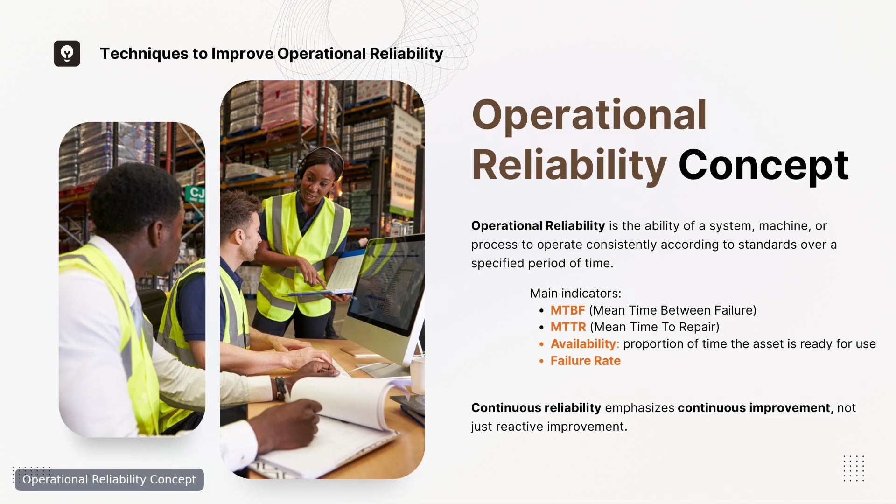The first maintenance strategy we will discuss is preventive maintenance, commonly known as PM. Preventive maintenance refers to scheduled maintenance activities that are performed before failures occur. The basic idea is simple. Instead of waiting for machines to break down, organizations maintain them periodically. Preventive maintenance can take several forms. The first is time based maintenance, which means maintenance activities are conducted at fixed time intervals. The second is usage based maintenance, where maintenance depends on machine usage, such as operating hours or production cycles. The third type involves routine inspections and lubrication activities.

Preventive maintenance offers several advantages. First, it can reduce unplanned downtime because problems are addressed before failures occur. Second, it can extend asset lifespan, allowing machines to operate longer. Third, it helps create more predictable maintenance costs. However, preventive maintenance also has some disadvantages. One major issue is over maintenance, where machines are serviced even though they do not actually require maintenance. Another challenge is the lack of adaptability to real machine conditions. Because maintenance schedules are fixed, preventive maintenance is also less effective for random failures, which occur unexpectedly.

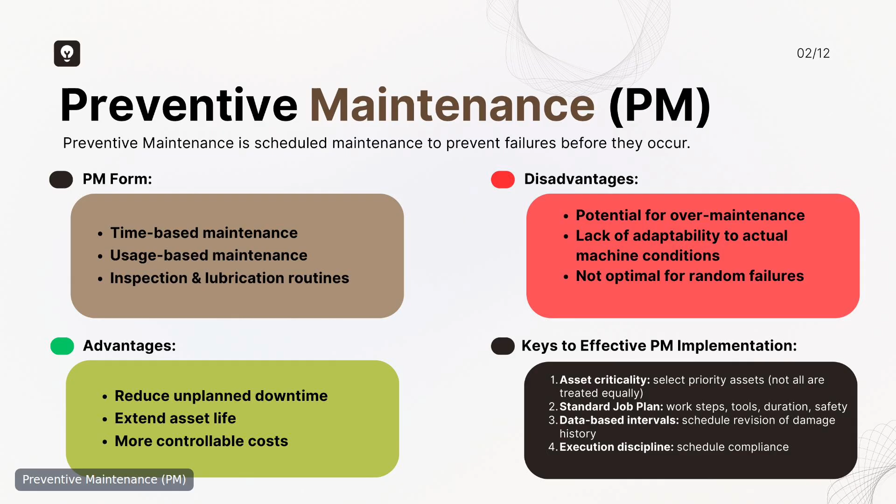For PM to be effective, several implementation principles must be followed. Organizations must first determine asset criticality, meaning not all machines require the same level of maintenance. Second, organizations must develop standard job plans, including procedures, tools, time estimates, and safety guidelines. Third, maintenance intervals should be based on historical failure data. Finally, organizations must ensure execution discipline, meaning maintenance schedules must be followed consistently.

The next strategy is predictive maintenance, often abbreviated as PdM. Predictive maintenance is a more advanced approach that uses actual condition data from assets to predict potential failures. Instead of following fixed schedules, predictive maintenance monitors equipment conditions in real time. An important concept in predictive maintenance is the P-F interval. The P-F interval refers to the time between potential failure and functional failure. Potential failure occurs when early signs of damage begin to appear. For example, vibration levels may increase or temperature may rise. Functional failure occurs when the asset can no longer perform its intended function.

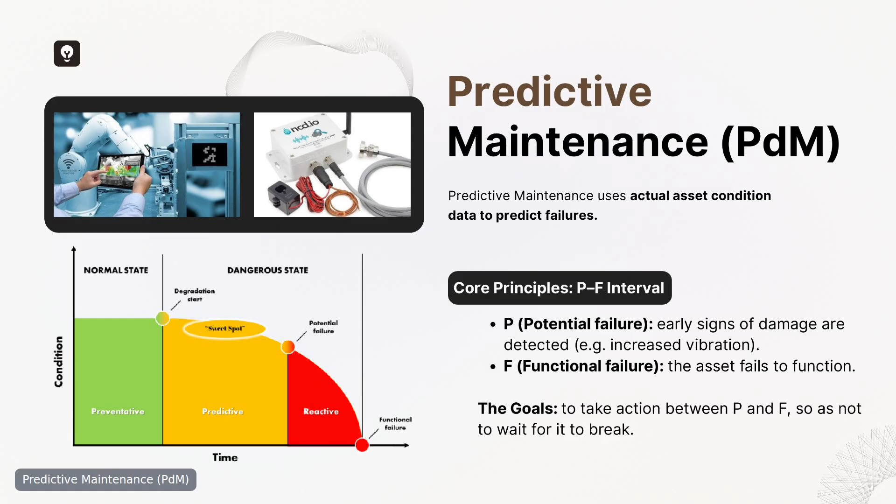The main objective of predictive maintenance is to detect problems during the P-F interval. This allows maintenance teams to repair or replace components before total failure occurs. This strategy significantly reduces unexpected breakdowns. Predictive maintenance relies heavily on monitoring technologies. One commonly used technique is vibration analysis, which can detect mechanical problems such as imbalance, misalignment, or bearing wear. Another technique is thermography, which uses thermal imaging to identify hotspots in electrical systems or motors.

Organizations may also perform oil analysis, which examines contamination levels and metal particles in lubricants. More recently, companies are using IoT sensors and AI analytics to monitor machine conditions in real time. These systems can track variables such as temperature, vibration, and electrical current. Predictive maintenance provides several benefits. First, it enables data driven maintenance decisions. Second, it minimizes downtime because failures can be predicted. Third, it improves long term cost efficiency.

However, predictive maintenance also has limitations. It requires initial investment in sensors, software, and technical expertise. The system also depends heavily on data quality. If the data is inaccurate, the predictions will also be incorrect. Finally, organizations must establish clear decision processes determining when maintenance action should be taken after alarms are detected.

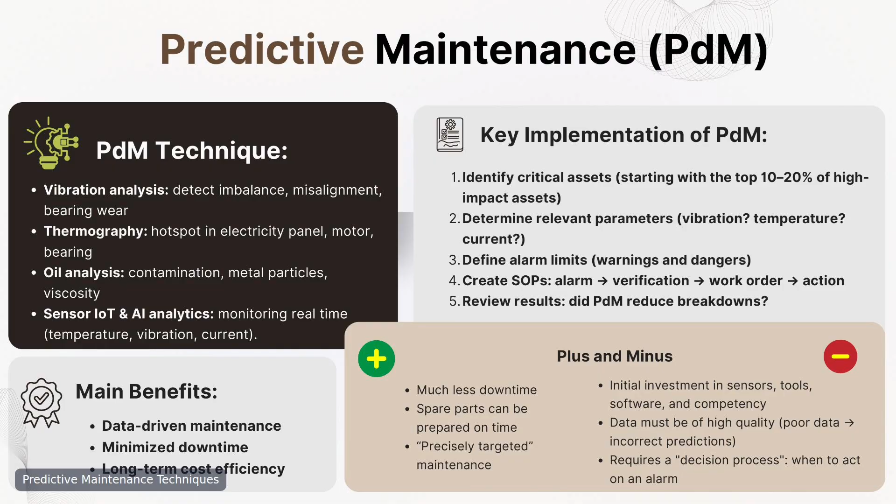Another important approach is reliability centered maintenance, or RCM. RCM is a systematic approach used to determine the most appropriate maintenance strategy for each asset. Instead of applying the same maintenance method to every machine, RCM focuses on understanding the function of an asset, possible failure modes, the consequences of those failures, and the most effective maintenance strategy. RCM focuses strongly on risk and impact analysis.

For example, some failures may only cause minor inconvenience while others may lead to serious safety risks or major financial losses. RCM is widely used in industries where reliability is extremely critical. These include aviation, oil and gas, power generation. One advantage of RCM is that maintenance decisions become logical and cost effective.

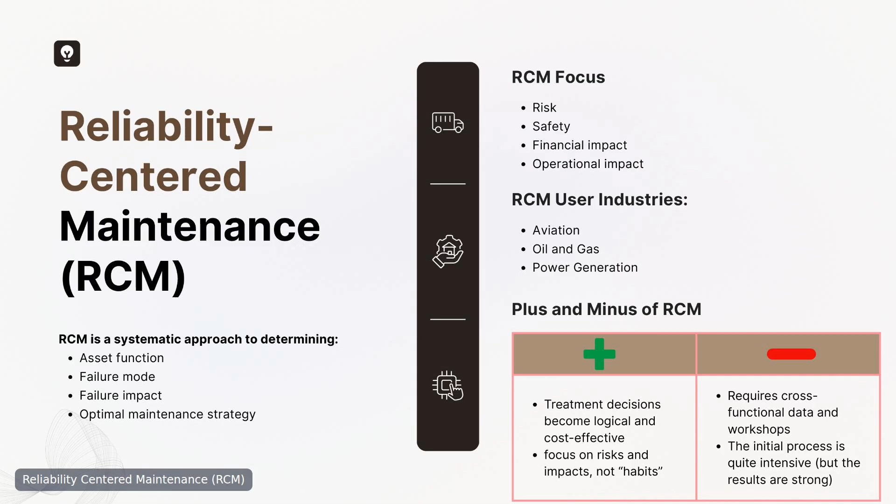However, implementing RCM can be challenging. It requires cross functional collaboration involving engineers, operators, and maintenance specialists. The initial analysis process can also be time consuming. Let us now briefly examine the typical steps involved in implementing RCM.

The first step is defining the function of an asset. For example, a pump may be required to deliver a certain flow rate at a specific pressure. The second step is identifying functional failures. This occurs when the asset cannot perform its intended function. The third step is identifying failure modes, meaning the specific causes of failure. For instance, a pump may fail due to worn bearings, damaged impellers, cavitation, or leaking seals.

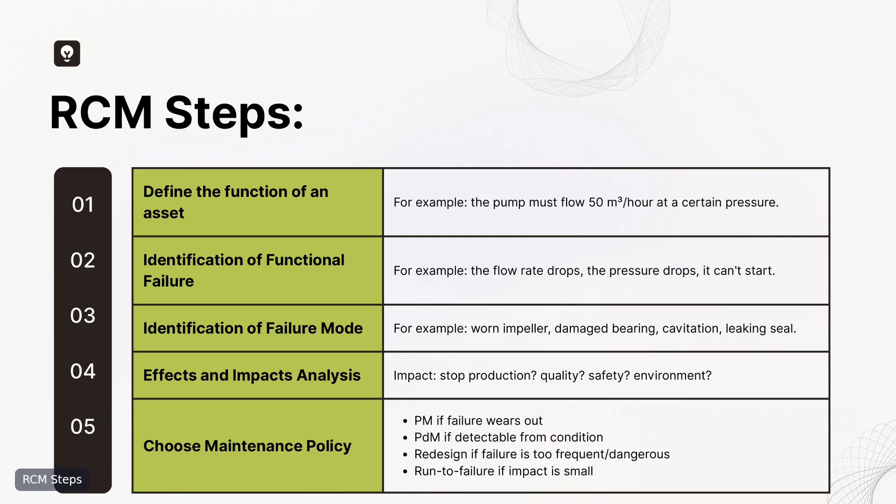The fourth step is analyzing the effects and impacts of failure. This analysis considers whether the failure affects production, product quality, safety, or the environment. Finally, organizations must choose the appropriate maintenance policy. Possible strategies include preventive maintenance, predictive maintenance, redesign, or run to failure.

Another widely used approach is total productive maintenance, or TPM. TPM is a maintenance philosophy that emphasizes involvement from all employees, not only maintenance technicians. In TPM systems, machine operators also play an important role in maintaining equipment. The ultimate goals of TPM are zero breakdowns, zero defects, zero accidents.

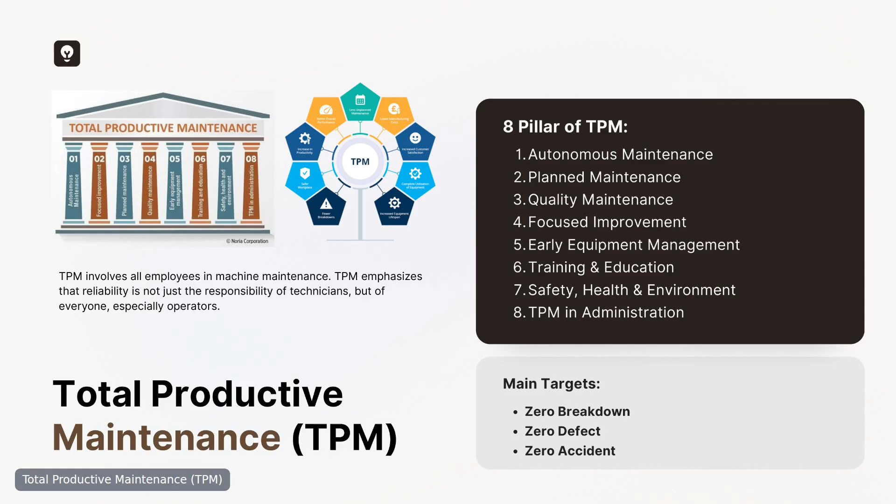TPM consists of 8 main pillars. These include autonomous maintenance, planned maintenance, quality maintenance, focused improvement, early equipment management, training and education, safety, health, and environment, and administrative TPM. One of the most famous implementations of TPM can be found in the Toyota production system.

After implementing maintenance strategies, organizations must evaluate their effectiveness. Reliability performance can be assessed using both quantitative and qualitative indicators. Quantitative indicators rely on technical data, such as downtime or failure rates. Qualitative indicators relate to organizational factors, such as maintenance discipline and work culture.

Several important key performance indicators are commonly used. These include overall equipment effectiveness, availability rate, downtime frequency, maintenance cost ratio, failure trend analysis. Let us now discuss these indicators in more detail.

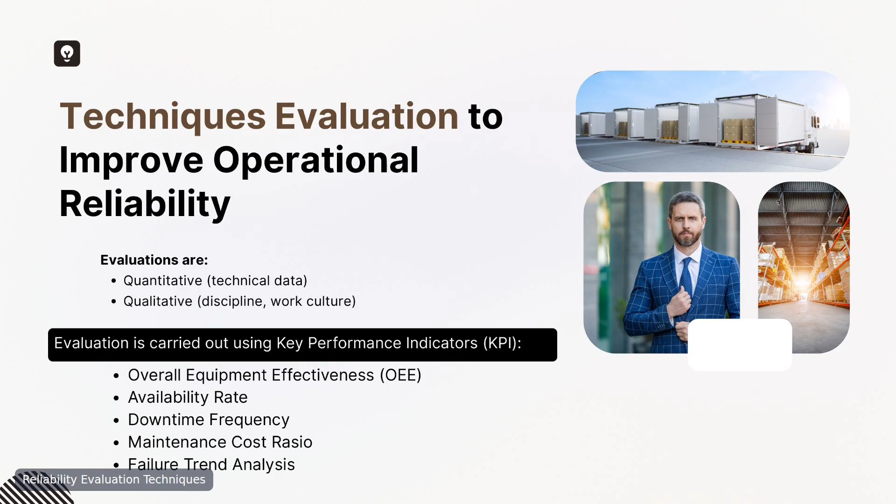One of the most widely used reliability indicators is overall equipment effectiveness, or OEE. OEE measures how effectively production equipment is utilized. It combines three dimensions: availability, performance, quality. The formula is OEE equals availability x performance x quality.

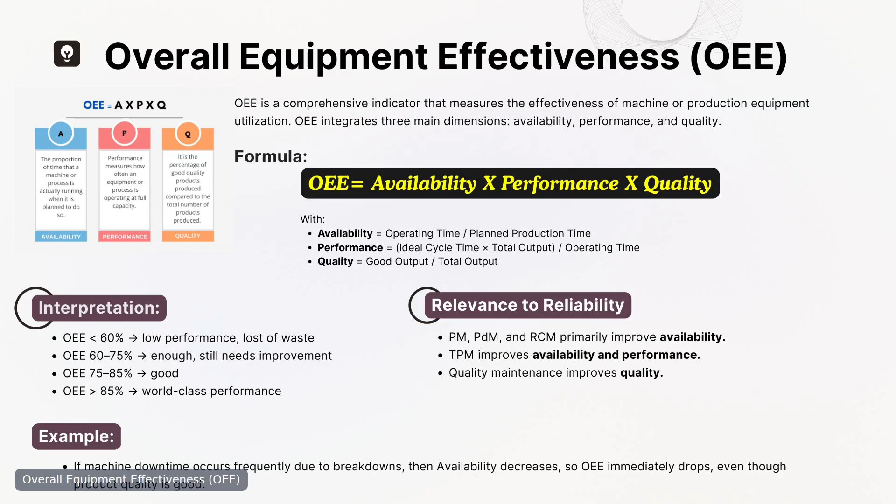If OEE is below 60%, it indicates very poor operational performance. If OEE is between 60% and 75%, the system is functioning but still requires improvement. If OEE is between 75% and 85%, the system is performing well. If OEE exceeds 85%, the organization is considered world-class in operational performance.

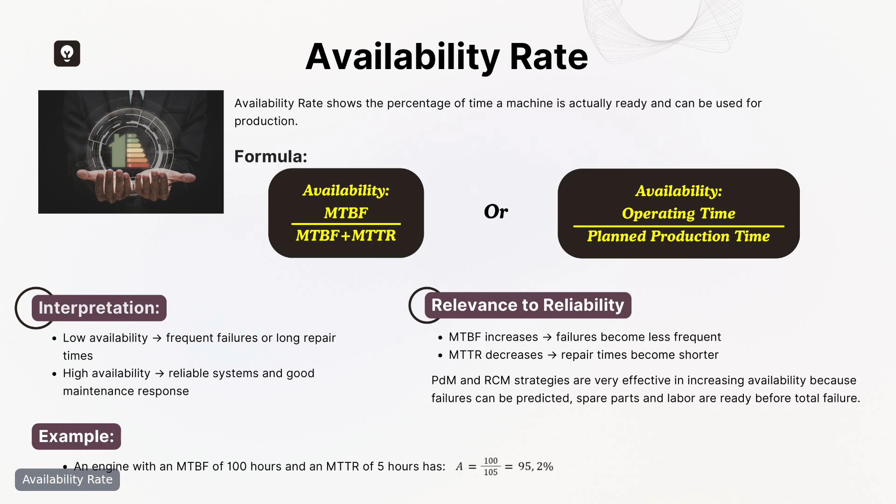Another important indicator is the availability rate. Availability measures the percentage of time that a machine is ready for production. Availability can be calculated using the following formula. Availability equals MTBF divided by MTBF plus MTTR. This means availability increases when failures occur less frequently and repair times become shorter. High availability indicates a reliable system with efficient maintenance response. Predictive maintenance and reliability-centered maintenance are particularly effective at improving availability.

Another useful metric is downtime frequency. This indicator measures how often a machine experiences downtime during a given time period. High downtime frequency may indicate chronic operational problems, ineffective preventive maintenance, poor maintenance discipline. Managers often use this metric for Pareto analysis, applying the 80-20 principle to identify the most critical failure causes.

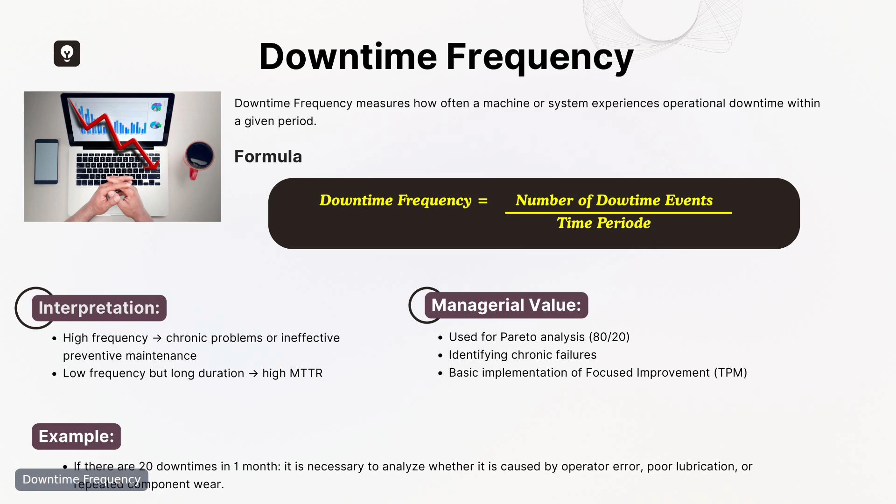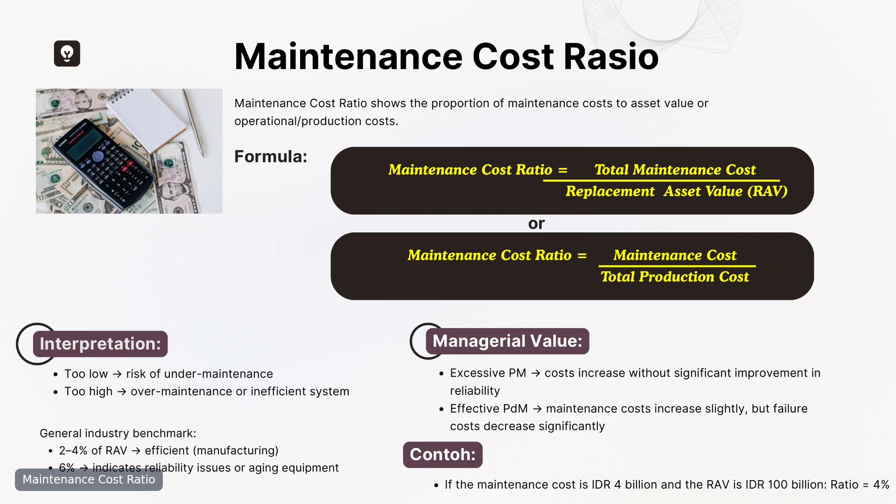Maintenance performance must also be evaluated financially. One important indicator is the maintenance cost ratio. This metric measures the proportion of maintenance costs relative to asset value or production costs. If the ratio is too low, it may indicate under maintenance, which increases the risk of failures. If the ratio is too high, it may indicate inefficient maintenance practices. In manufacturing industries, a typical benchmark is 2 to 4% of replacement asset value.

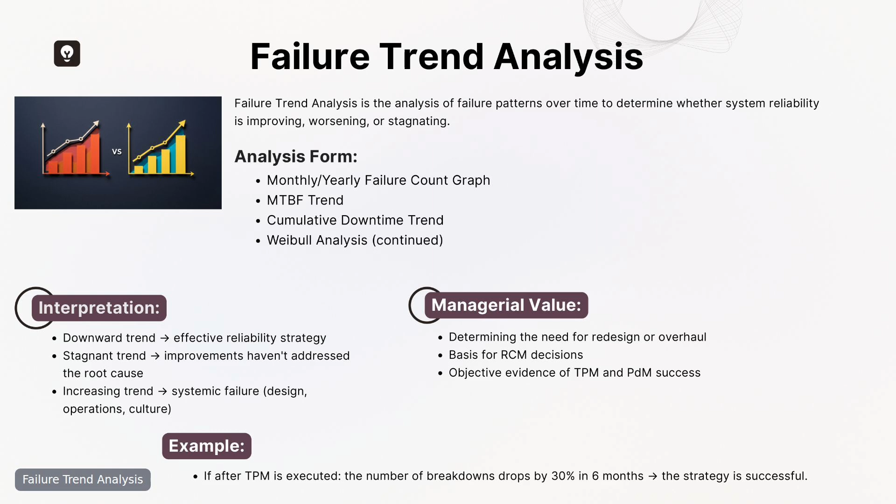Failure trend analysis evaluates whether reliability is improving over time. Organizations analyze patterns such as monthly breakdown counts, MTBF trends, cumulative downtime trends. If failure rates decline over time, the reliability strategy is working. If failure trends increase, it indicates deeper systemic problems. This analysis also supports strategic decisions such as redesigning equipment or upgrading maintenance systems.

Maintenance decisions must also consider cost and benefit trade-offs. Organizations must compare two main types of costs: maintenance cost and failure cost. Failure costs may include lost production, safety risks, environmental damage. Preventive maintenance is relatively cheap in the short term. However, predictive maintenance may be more cost effective in the long term. Organizations also evaluate return on maintenance investment to determine whether maintenance investments produce operational benefits.

Let us now examine two real-world examples. The first example is PT Pertamina, the Indonesian state-owned energy company. Pertamina uses sensor-based predictive maintenance in its refinery operations. They also apply reliability-centered maintenance to critical assets and implement TPM in key operating units. As a result, the company has successfully reduced unplanned shutdowns and increased refinery availability.

The second example is Toyota Motor Corporation. Toyota integrates total productive maintenance into the Toyota production system. Operators are responsible for performing routine machine maintenance. This approach, combined with continuous improvement practices known as Kaizen, has helped Toyota achieve high OEE and minimal downtime.

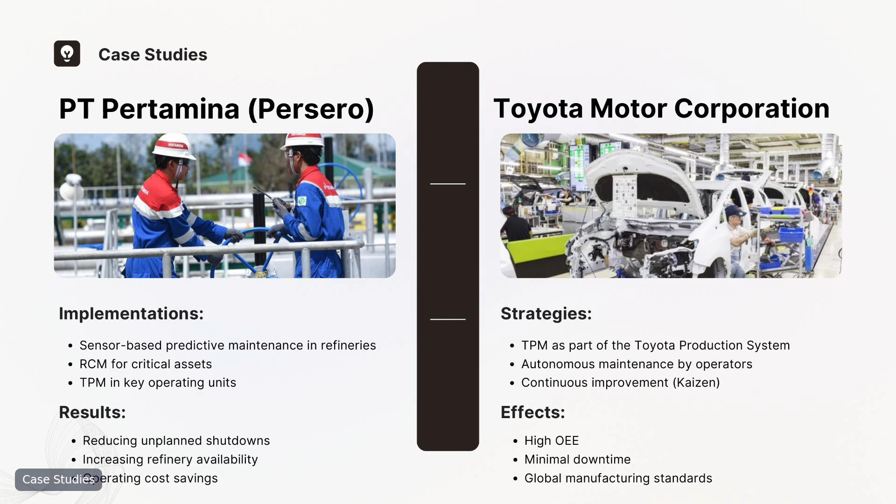To conclude today's lecture, let us summarize several key points. Operational reliability is a fundamental factor in achieving long-term competitiveness. Different maintenance strategies, including PM, PDM, RCM, and TPM, complement each other. Reliability management must be data-driven and supported by cost-benefit analysis.

Most importantly, successful implementation requires a strong organizational culture that prioritizes maintenance and continuous improvement. When organizations successfully manage reliability, they can achieve higher efficiency, improved safety, and sustainable operations. I hope this session has helped you understand how maintenance strategies contribute to operational excellence.